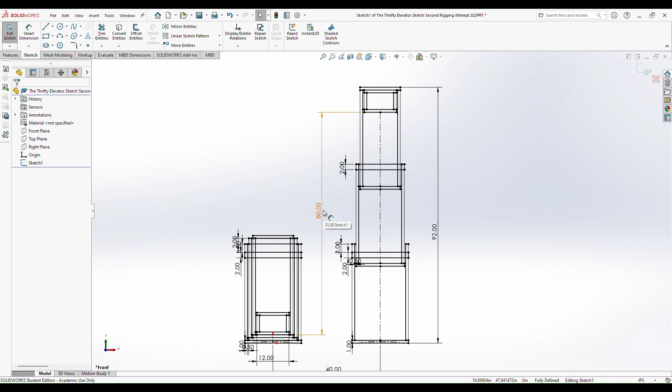So the next step is to draw a rigging sketch for the elevator so that we know exactly where all of the pieces of the rigging are positioned. So for that, I'm actually going to delete some of these dimensions that we put in before and go back to dimensioning pieces directly. And that's because I'm going to separate the stages, and that'll make it easier to put this together without making any mistakes.

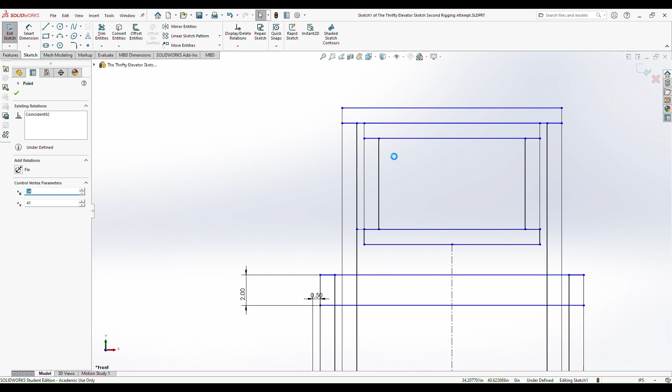So this way I can pull the stages apart. And the reason why I'm doing it this way is because the rigging for any given stage makes a loop within that stage. And you can see this most clearly with the chain. So the chain here starts at the bottom of this stationary U structure, and the top of it is anchored to the top of the same stationary U structure. So it's just this continuous loop. And it's the same thing for all of the lines, all the Dyneema in between.

This pair of blocks down here, if you follow around the outside, you can see it's this rectangular frame, and there's blocks that are just above and below each other on the same rectangular frame. So because this is now separated, when I go to put in the blocks here and here, I won't accidentally put one block here and one block here and try and stretch between them. So I could do that very easily on this drawing.

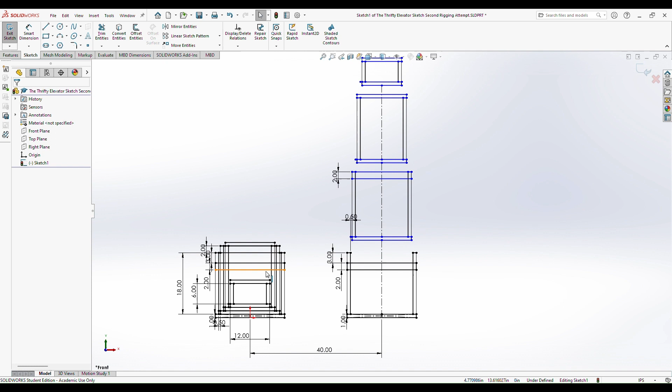And after that, I can take and I can put this back together. I can put the pieces on the collapsed version, and we'll build it from that. So now that I've done this, let me make sure this sketch is fully dimensioned at least, fully defined. I'm actually going to exit that sketch. We'll name this structure. And we'll make a new sketch on the front plane.

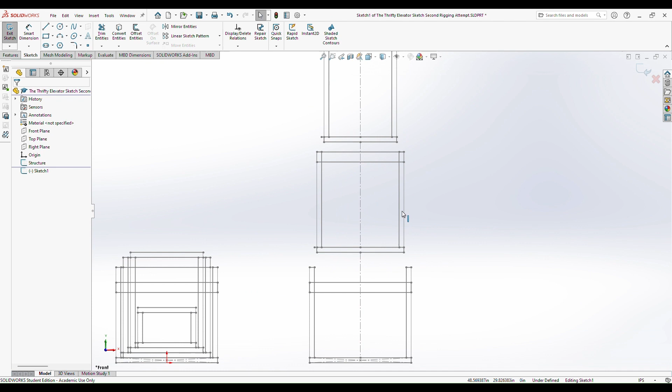All right. So, first piece of the rigging is going to go on this one. And I will start by sketching the block that represents, well, the block. It's actually called a block. We know it's going to be 1 inch tall because if you look over at the guide, it's the same height as a tube here. And let's see, total width of this thing is going to be 1/4 inch plus 1/2 plus 1/2 plus 1/2 plus 1/4. This is going to be 2 inches wide. And these holes are 1.5 inches apart, evenly spaced inside that.

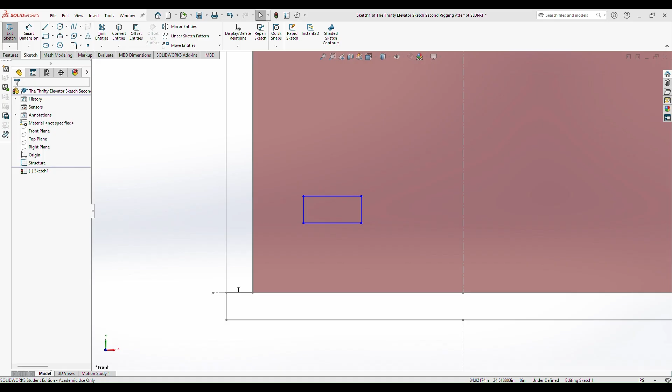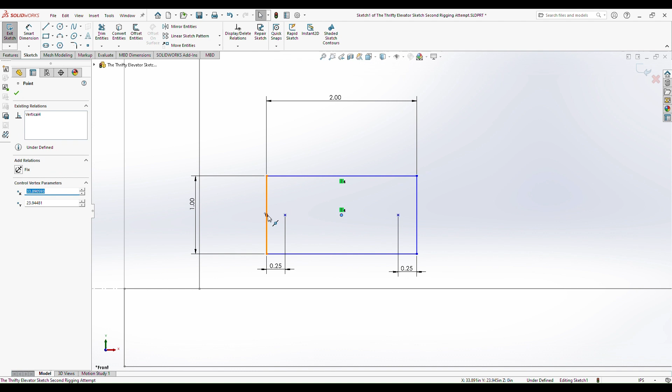So 2 inches, 1 inch, here are the 2 attachment points. Put that all horizontal. Oh, I should do a midpoint too. Vertical, horizontal. So this should all be pretty well fixed at this point. And I could just sort of install this on here, but I'm going to reuse this thing, I don't know, 8 times in the course of this sketch.

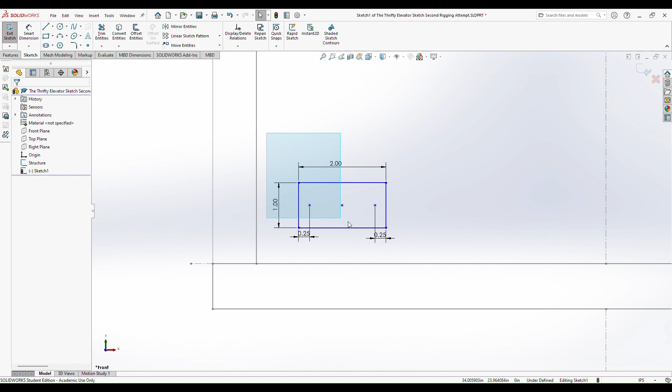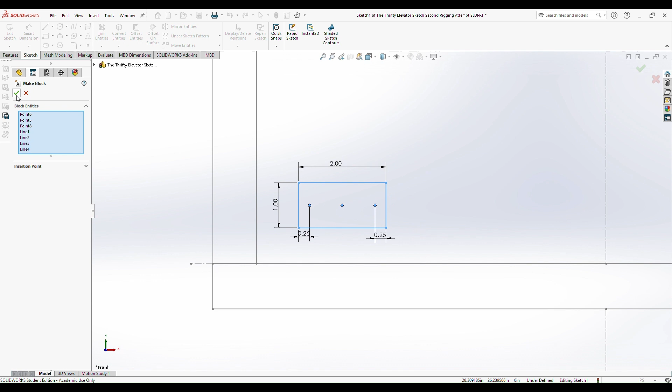So instead, I'm going to use a SolidWorks sketch feature. You can sort of make a part within a sketch. It's called a block. And let's see, make block. Here we go. Insertion points, we want to tell it, yep, so bottom left corner is a fine insertion point for it. It's just saying where in the sketch would you like to create the block from. So there we go, there's our block. And we can move this around now, which is nice.

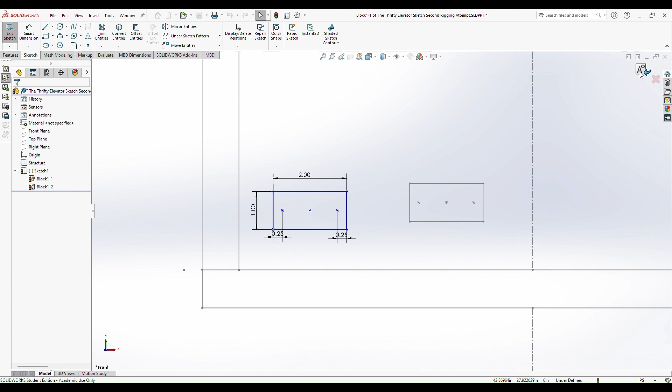And if we search for block, we can insert another copy of the block. And this thing here is now, you can't change the pieces of it, but it doesn't show those dimensions. If you want to edit it, you can go in and say edit block, and you can modify the pieces and it'll change all of them across the sketch. So, exit block. We should put this one here. I think we need to, yeah, there we go.

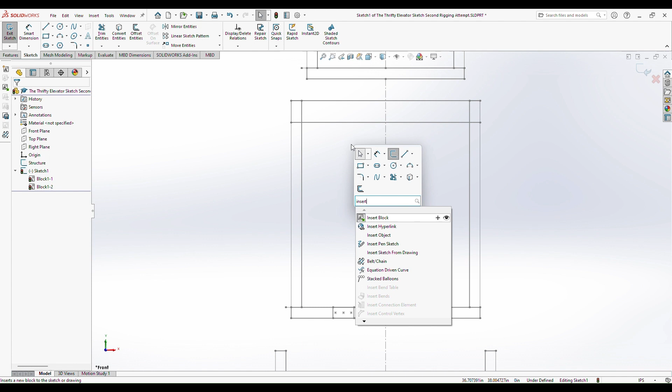These blocks are not inherently rotation locked. And now these two are. Good. So we'll do that. I'll insert the rest of the blocks for this stage. Make those vertical. And connect these.

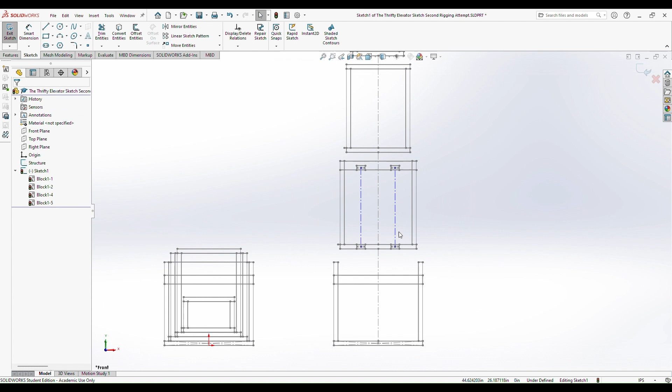Okay, now we have approximately what we need. So once we figure out the position for these, we'll have the block on the top and the block on the bottom. And in order to find the distance that it needs to go over, we can go back to the website again. Go back to this PDF of the elevator and find out how many holes over this is from the end. So here's 1, 2, 3, 4 half inches from the edge of the tube.

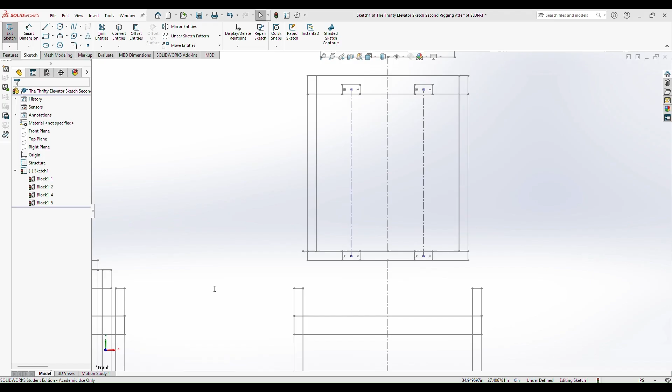Then I'll just throw a dimension. Edge of the tube, 4 half inches is 2. And that's that. So that's the first of the rigging. And we don't have the fixed attachment points, but this is the two pulleys, the two blocks. So let's do this one more time.

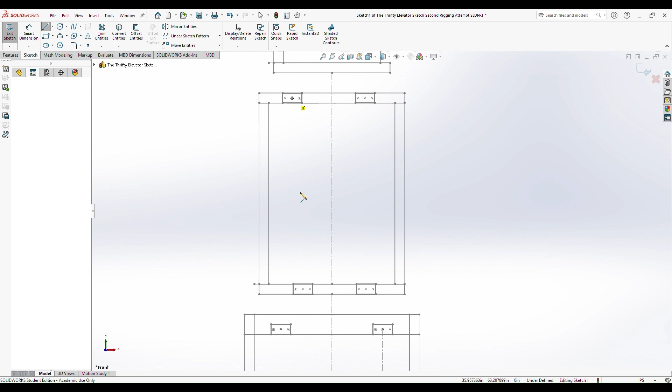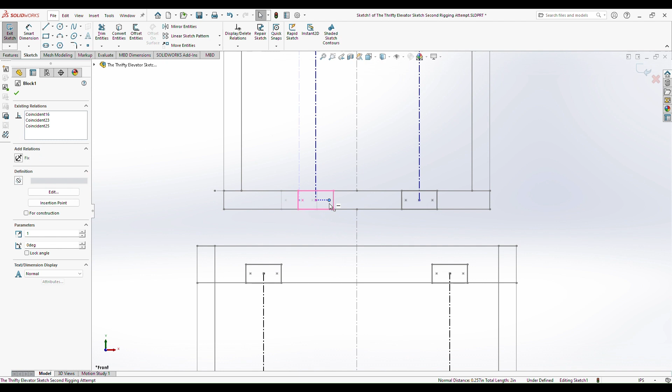Insert block. Link these together. Make these vertical. And then we could put these right next to each other, like collinear, but these blocks might interfere with each other at that point. They might hit. Let's see, would that be an issue? Maybe not. But I think let's try the next hole over, so that would be a ½ inch. And we can always go back and change this later if we need to. Okay. And that's that for this one.

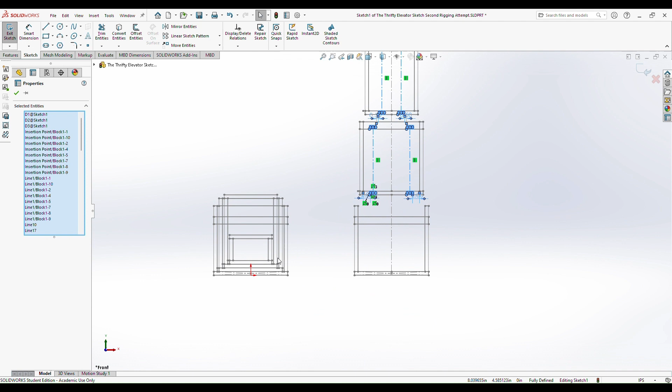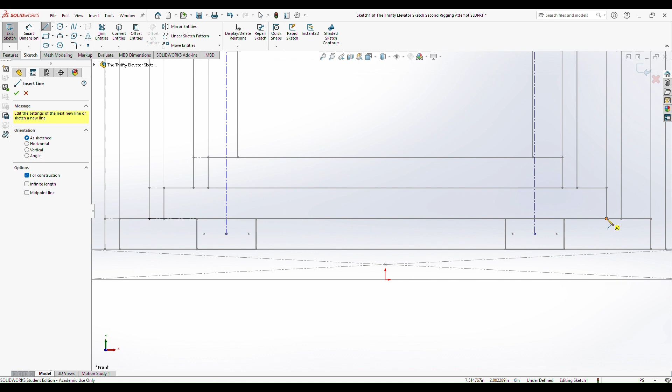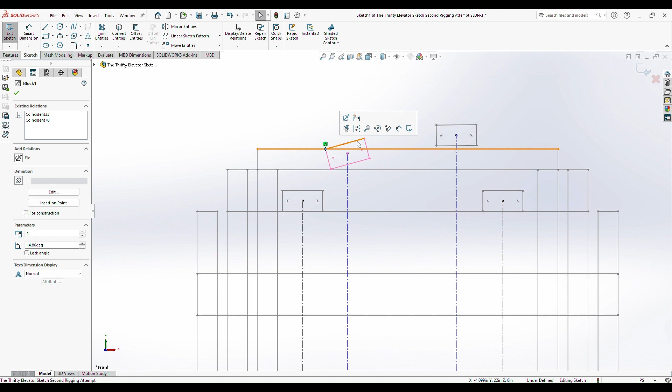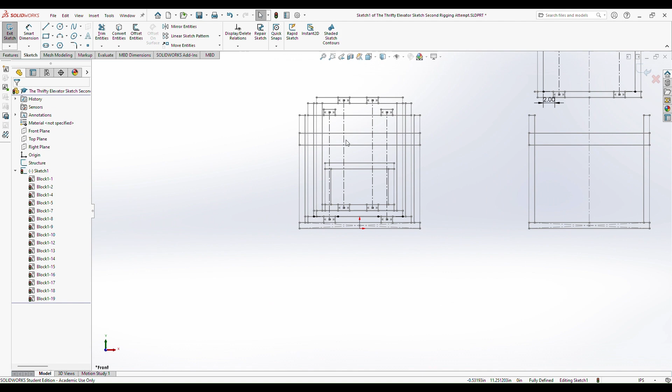So go ahead and paste this over here. And we'll do the same thing. We'll do this as a guide. And then for our distances, I'll make a few construction lines. Equal those. Same thing here. Here to here. Here to here. Equal. All right, we'll do the same thing with these. Okay, there we go. So that gives us our locations there.

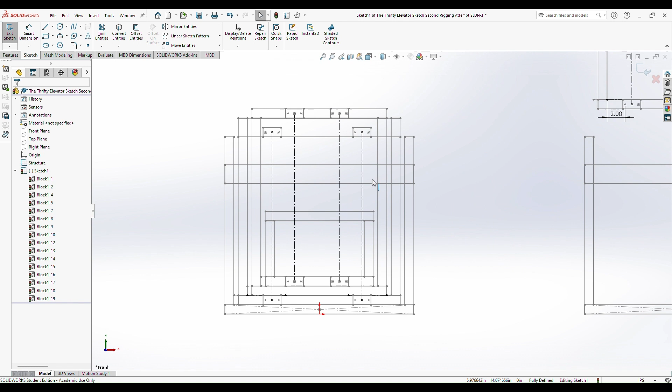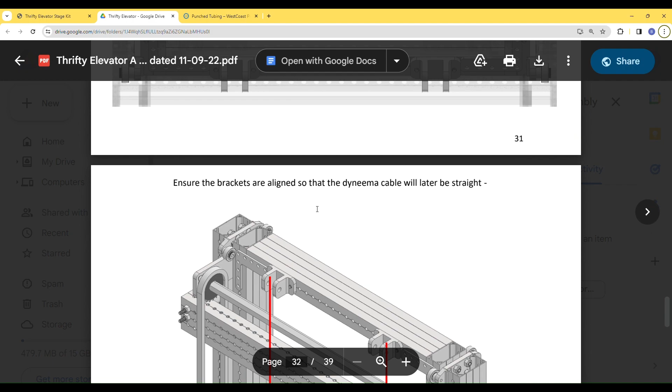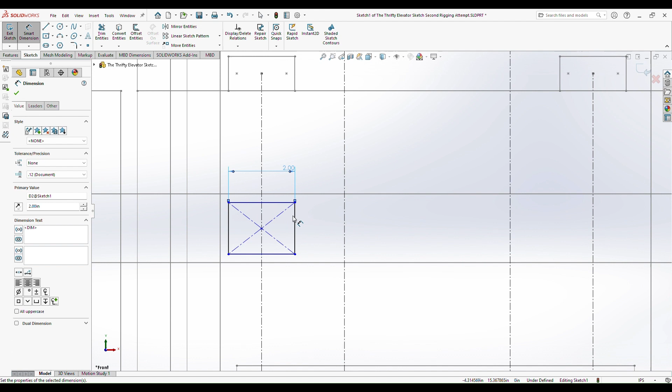And then the last thing that we need to do is we need to mark the points where the lines are attached, the fixed points where the lines are attached. So for example, we have one fixed point here. And I'll probably do another block for this. Let's look at the pieces that Rev recommends, the rope clamping blocks. Here we go, these. So those look to be about 2 inches square. And they'll be centered on there, and oh, that's convenient.

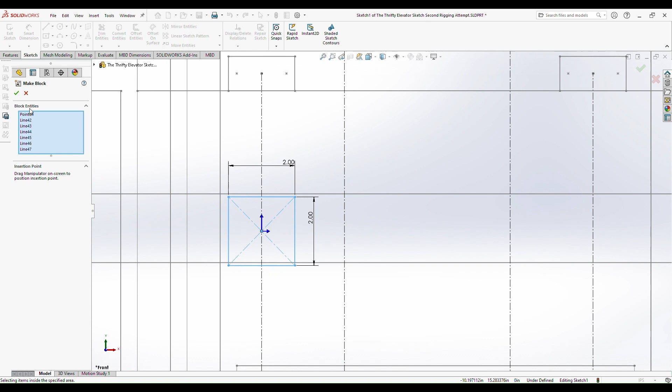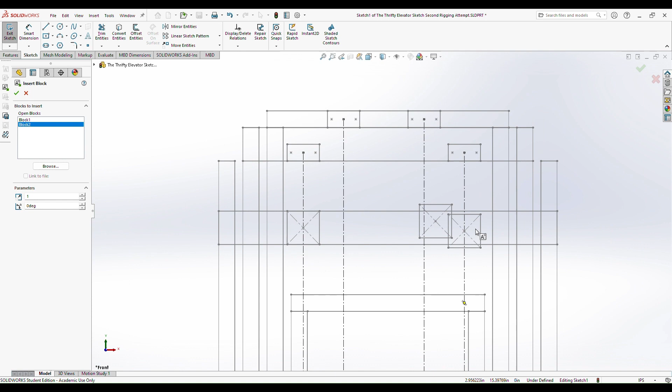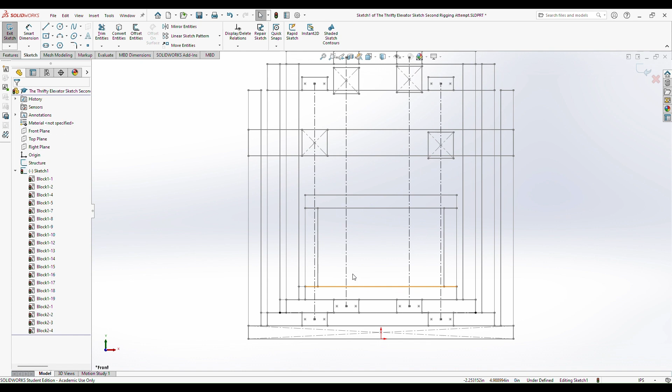So turn this into a block. Make block. Insertion point should be the center. That's good. Insert a few more of these. This one here. There. Do one here. And then there will be, oh, this isn't right. This is on the wrong, you see what I mean? You can put these on the wrong ones. There we go. And then our last two clamps are going to be here and here.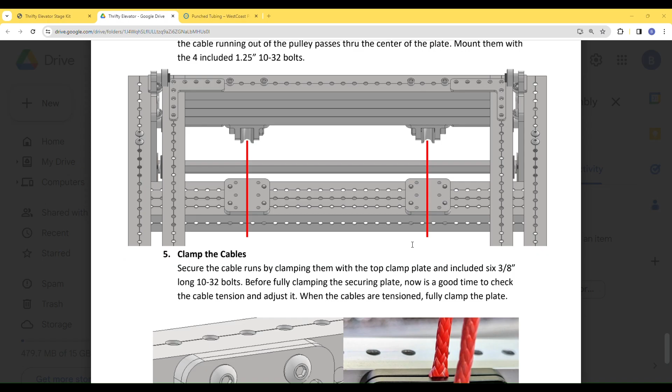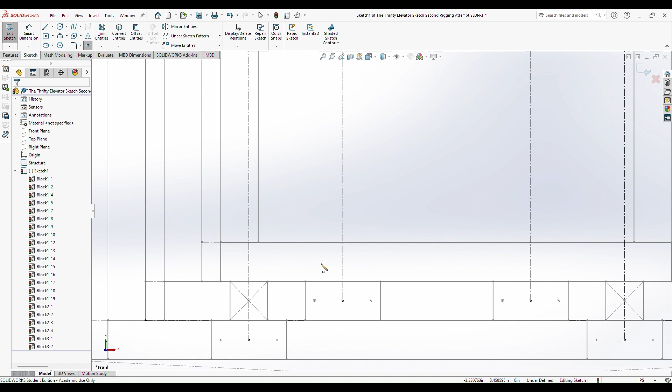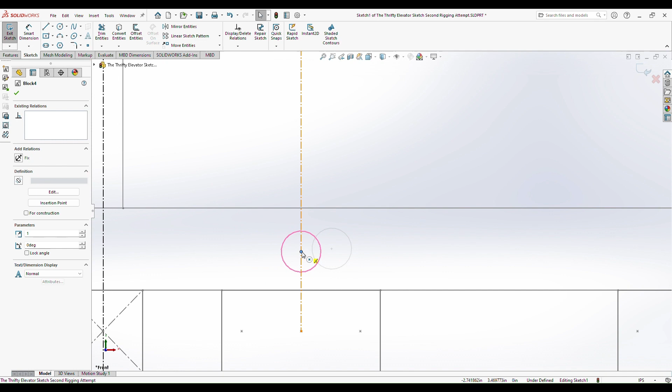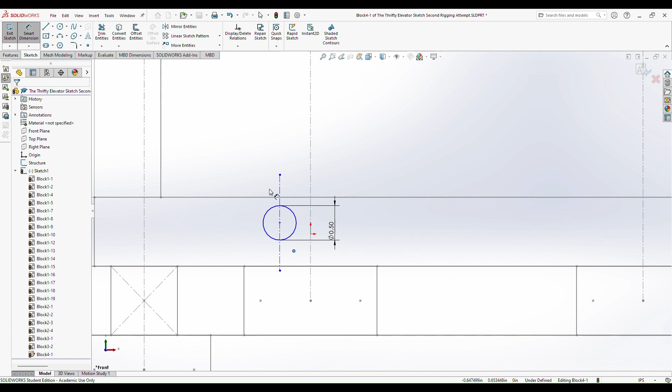So this will be the spools on the carriage, but we probably don't have room for spools here. We probably need to do some sort of custom clamping block. So I'm just going to create an arbitrary custom clamping block for the 3-stage. We'll put some circles for that. Oh, these are just bolt holes. Okay. Might as well make some little spools for this. I'm going to edit this block actually. I want to give it a line such that we can put it on here.

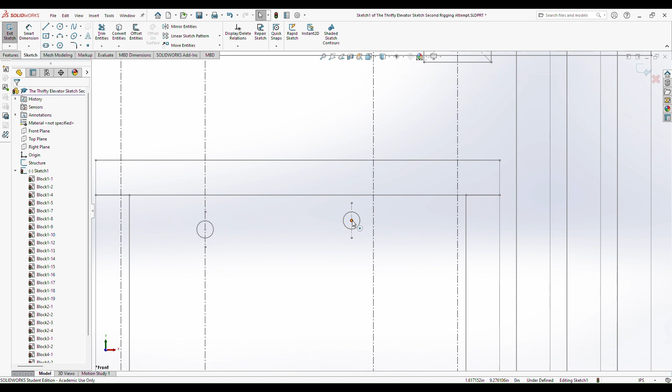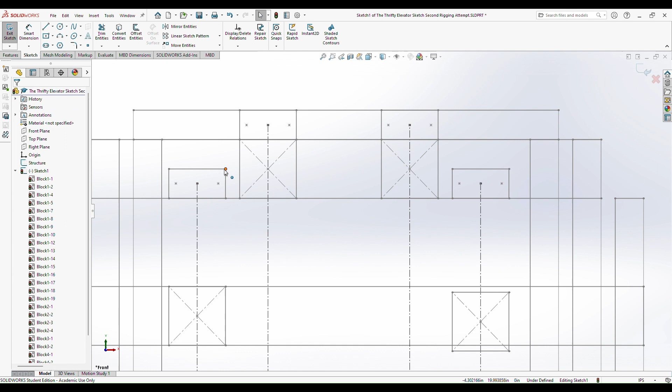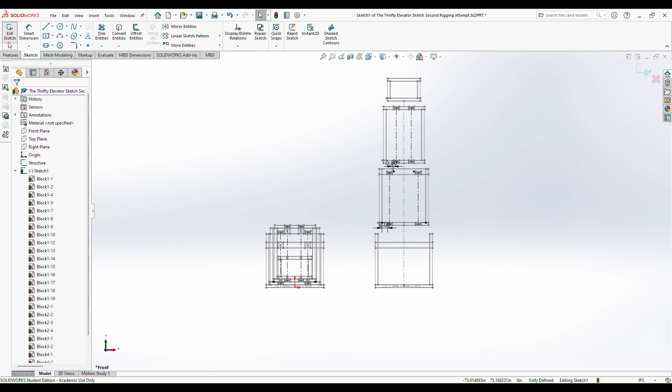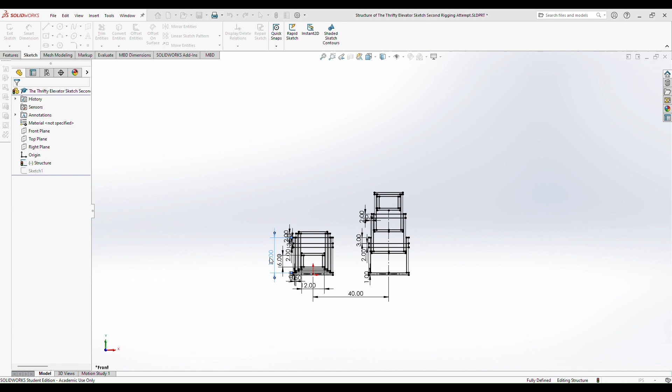All right. Here are our final blocks. Make these collinear. Now the sketch is fully defined. Good. So that should do the trick here. And now we can move the elevator back together over here. So we'll delete this. Scoot this back together. And all of our blocks update. That's what we want to see. Good. Okay. So now we've got our rigging drawn.